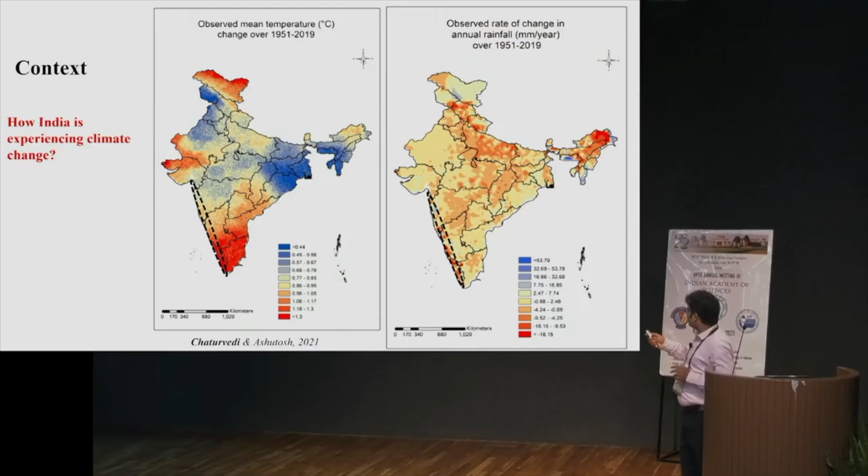I normally speak extempore, but realizing that you're a group of scientists, you're extremely analytical of whatever happens around you, so I thought I'd maybe write it down as well.

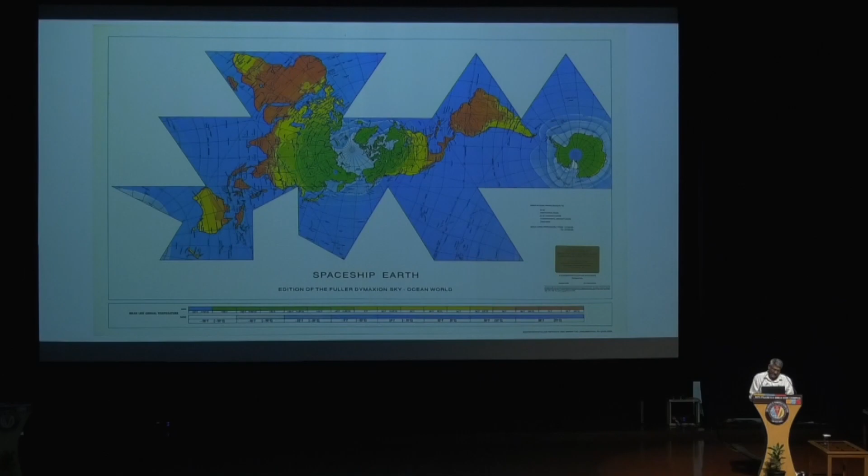He mapped resources across the world and showed how efficiency could be created by tapping resources in creating products, ignoring these man-made boundaries that divide us.

These powerful thoughts influenced my thinking, even in cyclostyled papers. We didn't have Xerox papers at that time. We cyclostyled these copies to start working with concepts of how you work with a triangle.

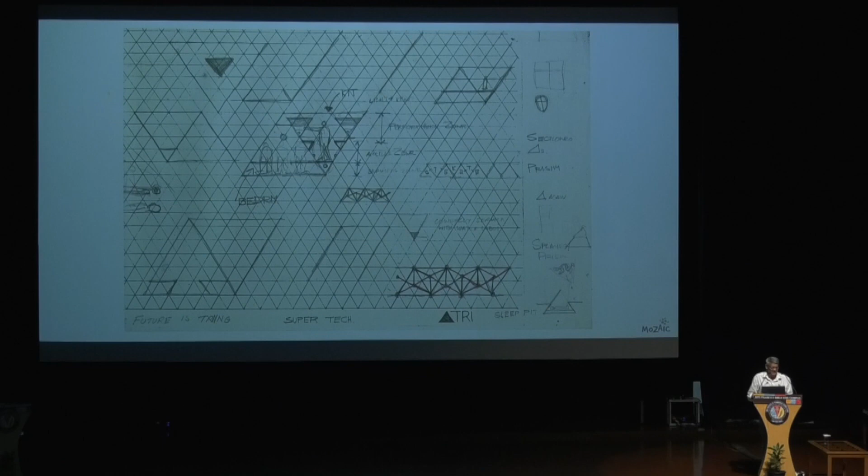Normally as architects, the first thing we draw is a square and we start filling it in or cutting it up. And these went on to developing various thoughts.

This was many years ago for the Goa airport design, using the triangle and eventually translated into a hexagon and subdividing it. This was before the era of aero bridges, where the actual nose of the plane entered the building, and it was a warp slab system.

So from the departure, you walk down a warp slab and enter one side of the aircraft, and on arrival you walk out the other side of the aircraft. So you're always walking down — it's much easier to walk.

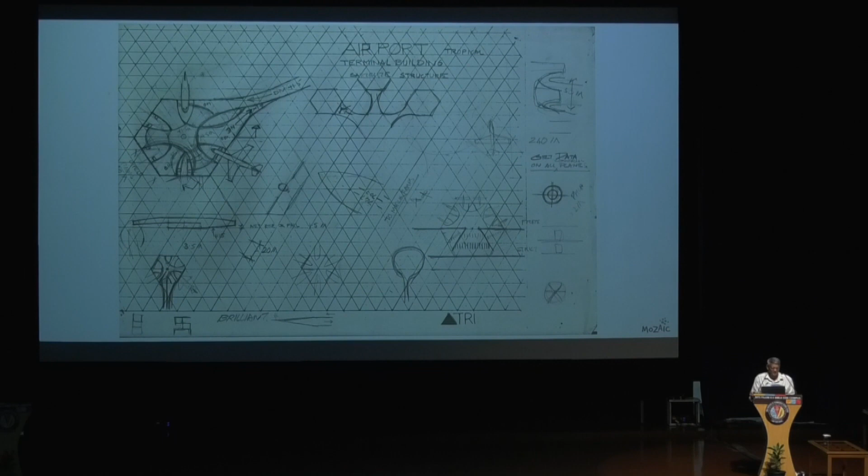And they're connected by a central elevator, which also connects up to the aerodrome tower.

Antonio Gaudi was another great inspiration. His buildings emerged from the earth in natural forms, where the structural approach of nature was explored in highly engineered buildings, almost as works of art.

The learnings of both these masters show up in our own work over the 40 years.

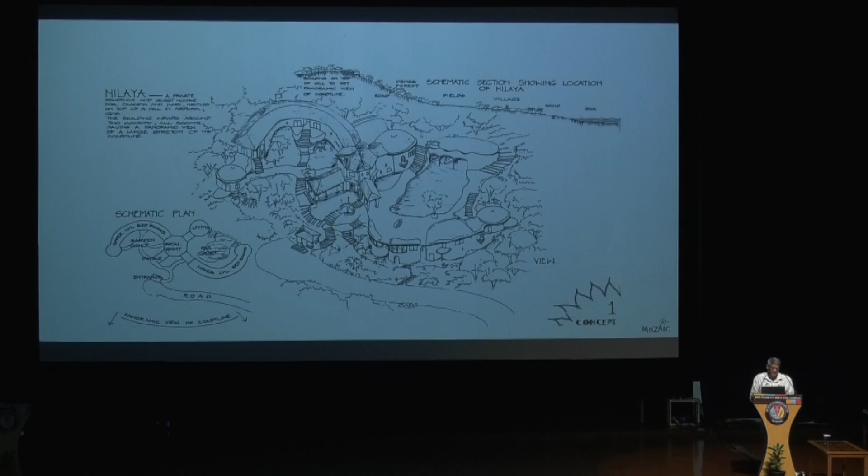Nilaya, built 30 years ago, was rated as one of the 100 best small hotels in the world at that time. It captured the multicultural diversity of Goa, using nature and cosmic themes.

Incorporating craft and recycling building materials, our projects recall the traditional building systems using arches, vaults, domes, with a minimum amount of concrete, reviving finishing techniques like situ floors, lime-plastered walls, using renewable wood resources like coconut and bamboo.

And over the years, we've trained and mentored over 200 building craftspeople who now work in different places across Goa.

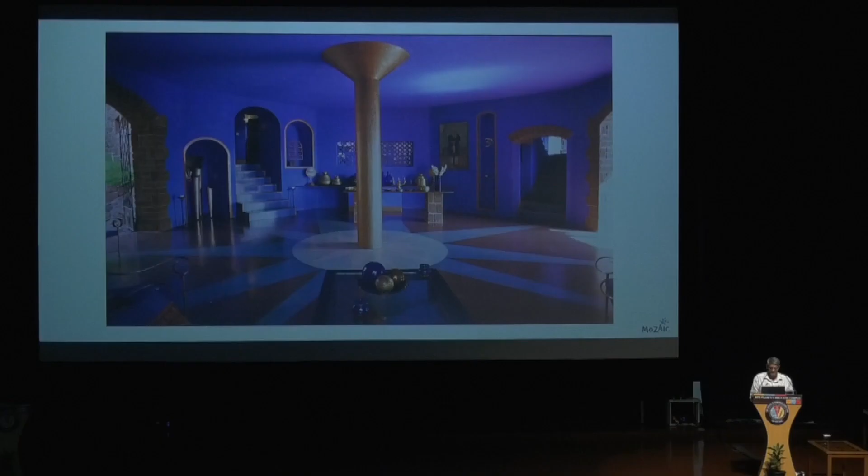The dome, for example, is actually an 11-meter dome, built in plain mud brick, built in 4 days itself, with no concrete at all. A lot of it's recycled materials, as you can see.

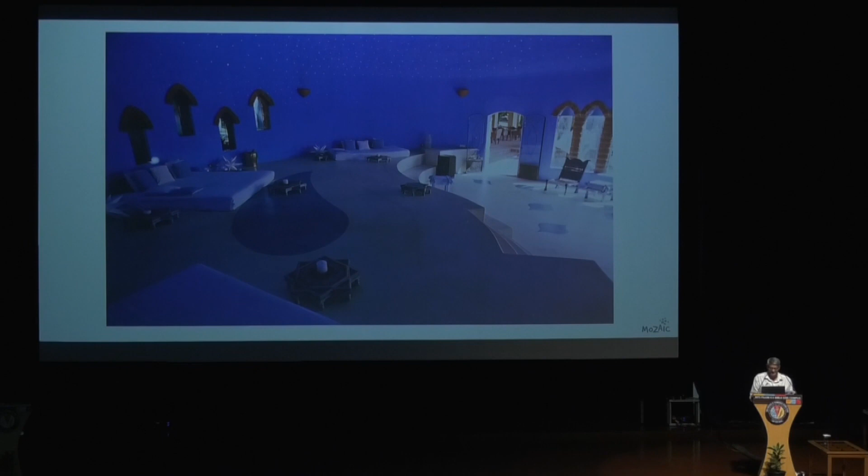And every room is theme-based. It's based on the sun, the moon, earth, and fire.

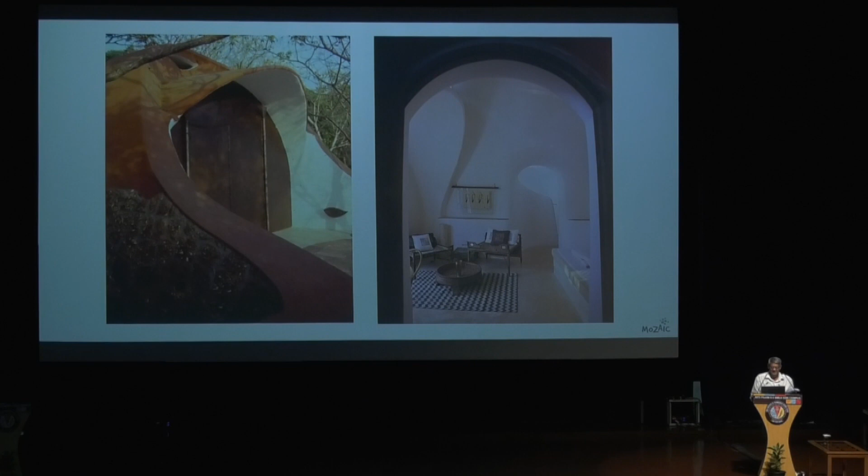The Kannada University in Hampi is an example of architecture responding to the style and form of construction in this historic area. It has the gopurams as visually anchoring structures, but also functional as wind towers that capture air at a high level beyond the radiant heat and hydrate it, thus cooling it through evaporative means, and allowing the cool air to enter this library building, dropping the temperature by about 8 degrees.

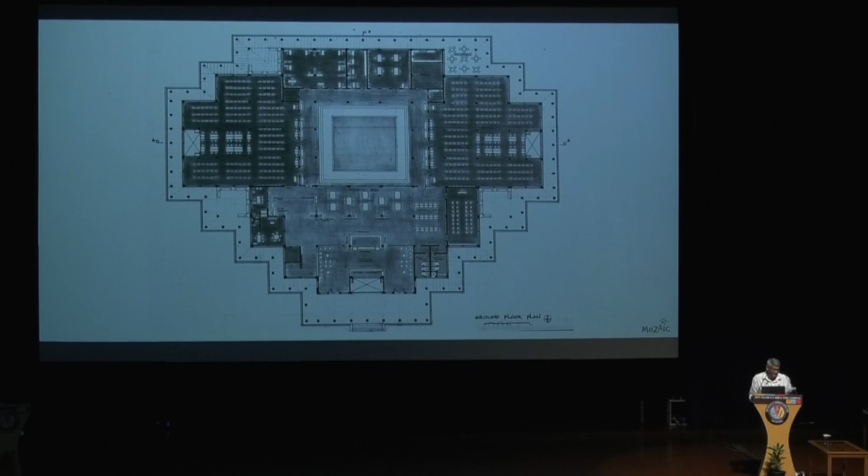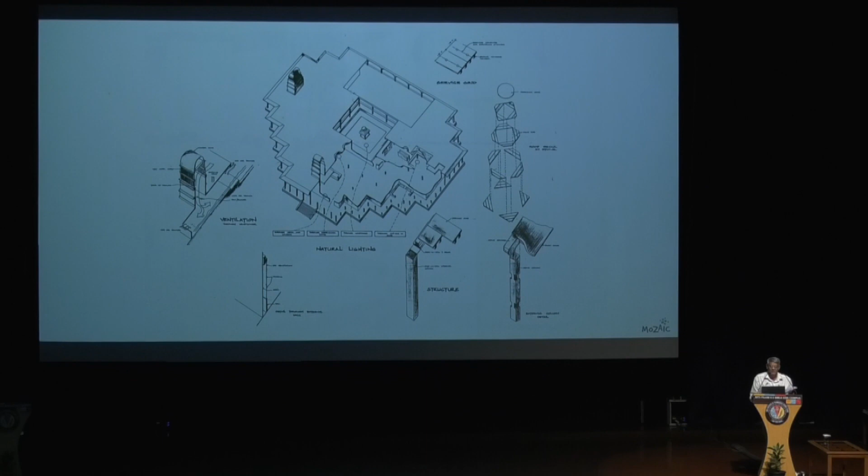It has a central traditional water body tank courtyard from where the heated air escapes, and deep corridors that shade the main building from the harsh sunlight of the area. The structure is built with over 90% local stone, recalling these traditional methods of building, where even the columns are solid granite, about 6 meters tall.

The cathedral in Karwar challenged the typical approach to a religious building by moving away from a symmetrical entrance and responding to the side road which really accessed the property.

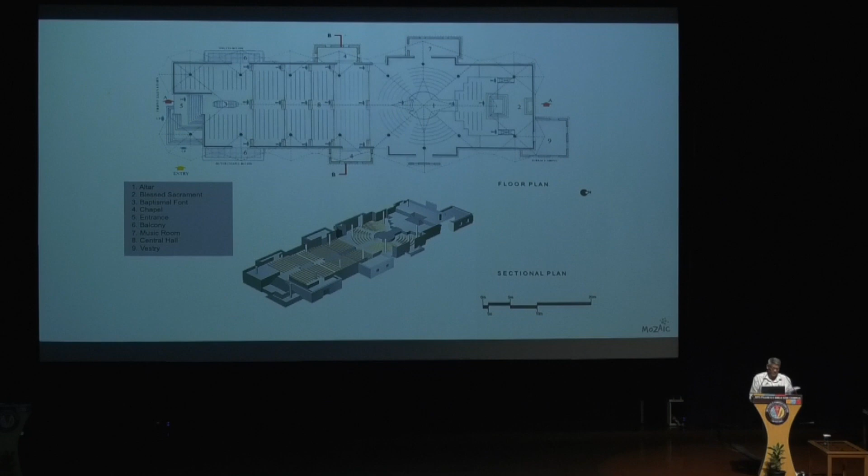Its roof is supported by columns in a tree-like structural system that floated above the screen walls. The building is stepped to enable its occupants to look at the central altar from a distance, and the area below the raised platforms are underground air tanks to even cool the building.

Every work of architecture is a challenge. For the Taj Fisherman's Cove in Mahabalipuram, a 65-room extension, it's situated on a narrow plot in a CRZ area. So we twisted the building and even got Tata Blue Scope to make trapezoidal roofing sheets to respond to its curvature. Architecture is all about adding a twist and pushing the boundaries a little.

The Taj Bandhavgarh Jungle Lodge responds to the local building materials of brick and mud plaster, but with technology tweaks of double walls and integrated heating and cooling systems. It is built with the local men of the village, and the women worked on the architectural decoration and also incorporating the arts and crafts in its interiors and finishings.

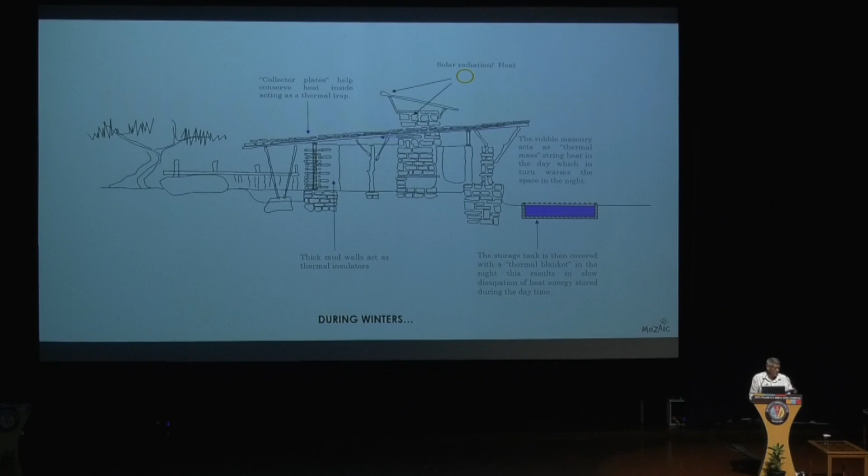The Sarai Lodge did a similar thing in Bandipur and also integrated village construction techniques of stone and thatch roofs to root the architecture of the area. Our lodges don't just respond to the materials and craftsmanship in the area, but also look at passive technologies in heating and cooling the buildings.

Some lodges, like the one in Tadoba, have a different approach, where we use recycled prefab panels to create a building that is lightweight and sits 12 feet above the ground, using fallen jungle wood and recycled thin planks for its finishing.

Being lightweight is an approach that Fuller also spoke about in determining the efficiency of buildings. Hence, in this office building in Noida, we worked on a hollow column, hollow beam structural system, which actually ran the services right through the structural members. Most often, structural services actually run cladded to structural members, creating a messy situation.

Even the air conditioning system was a high-velocity system, much like the ones used in vehicles, giving cool air at its needed points. The building is in steel, completely modular, with stone slabs mounted on neoprene pads.

This allows for change over time and even complete dismantling of the building. And if one sells it after dismantling, one could possibly get more than the cost of building it, given constant rise in construction prices, whereas most buildings are actually demolished and all its value is just landfill.

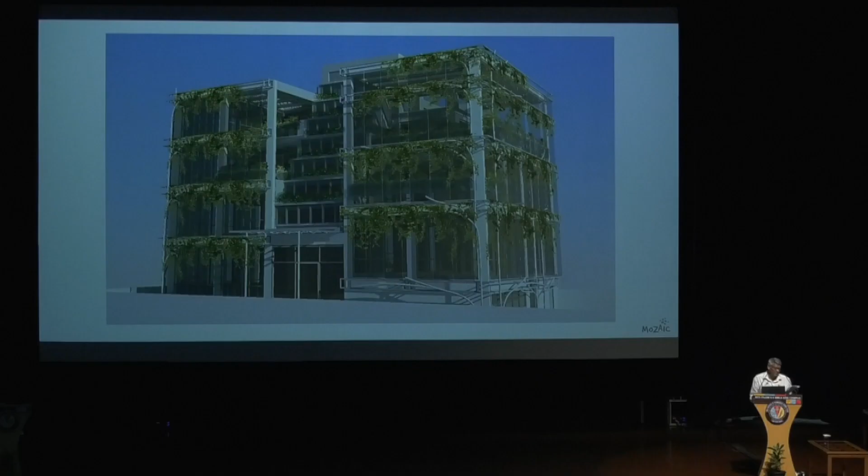Natural stone seemed the most sensible choice from a perspective of embodied energy. But when we visited the quarries, we found tremendous water and air pollution, and more than that, human rights violations, where workers were almost treated like bonded laborers, trying to repay the loans they had taken.

Whereas a vitrified tile, even though it had a high embodied energy, used material efficiently, handled pollution effectively, and gave workers a fair wage. So when you talk about sustainability, it's understanding individual situations and responding to them in a sensible manner.

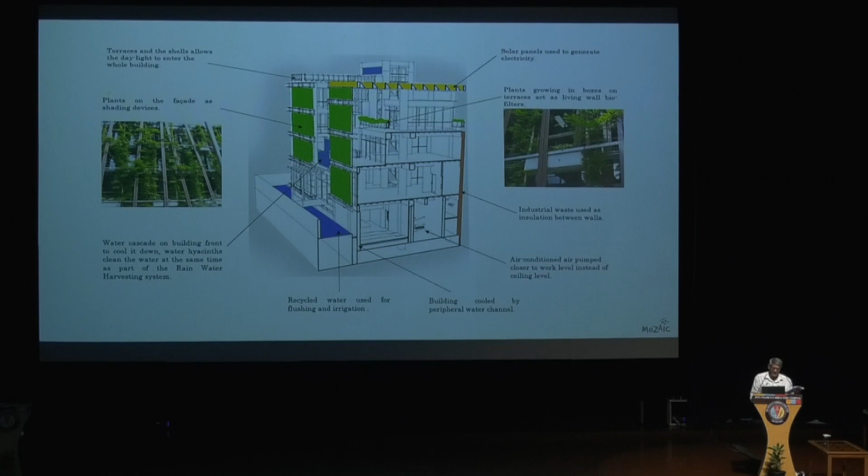We're working on a small 50 square meter, 2-bedroom house, which is completely off the grid, self-sufficient in water, energy, and partly food as well. It has a built-in flexibility and is quick to build. Efficiency is also about the speed of construction and flexibility.

The water has an approach envisioned to be closed loop, cleaning its waste, much like in ships and space stations. Its freshwater and wastewater tanks actually act as the foundations of the main building.

In fact, Fuller in his designs had worked on shower systems for submarines. You could shower in half a glass of water using a high pressure jet in an enclosure where it didn't really need any water drainage point. It was high pressure, so you didn't need soap as well. You just run it over your skin, and eventually the evaporated air would be sucked back into the system and taken on. So we have technologies today that we can actually use effectively in areas where resources like water and energy are in short supply.

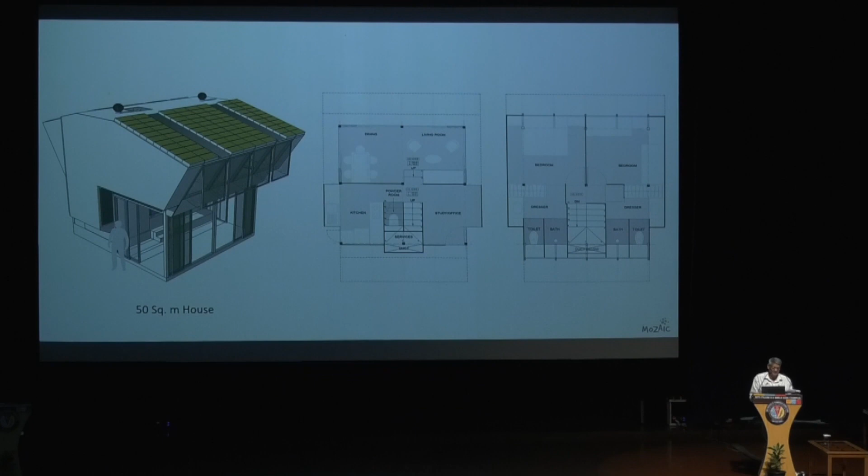This book on sustainability opens one's mind to the various complex issues of sustainability of money, cultures, value systems, community engagement, and challenges of the future. A must-read for any designer concerned about these.

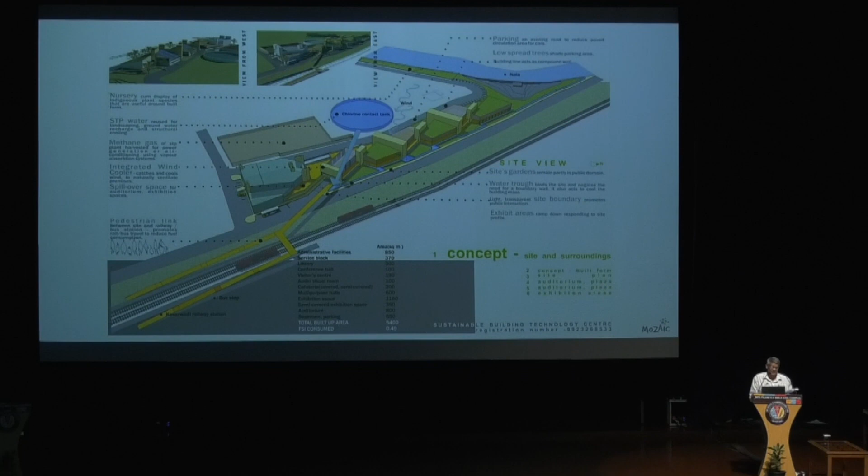We had an opportunity to work on the Sustainability Center at a large scale, having been shortlisted to design the Sustainability Center for the Pune municipality about 20 years ago. It gave us a chance to really understand the issue of materials, technologies, and systems, to deliberate on it and provide possible solutions.

But designing responsibly is also about engaging the end user. In this very small, low-cost house, here in Vasco, the clients actually got involved in purchasing the materials, directly engaging the workmen, decorating the house, and adding all the finer details to it. The boys actually sacrificed their scooter handle, the CDs, and their skateboards and everything. So it was a personal experience, and that's extremely rewarding.

If you're looking at sustainability, it's also about engagement. It's about how do you get people on board to understand these issues and really work with them.

This also brings us to the question of, does architecture need to be permanent? And how light a footprint can we go? This 40-seater beach restaurant for the Taj, we used all natural materials, some of which get renewed every season. It cost about 9 lakhs, and with a profit of about 50,000 every night, it covered the cost of construction in just under 3 weeks.

We suddenly see the viability of an architecture which is really temporary, used only for the purpose that it's meant for.

The Japanese are experts in being lightweight, and for these temporary beach rooms, we used wood much in the same way that they do, lifting it off the ground, keeping it as transparent as possible, enabling one to feel its free-floating nature, and adding a Japanese aesthetic of minimalism driven by nature themes and climate seasons of winter, spring, fall, summer. The interior detailing also included a haiku describing the season.

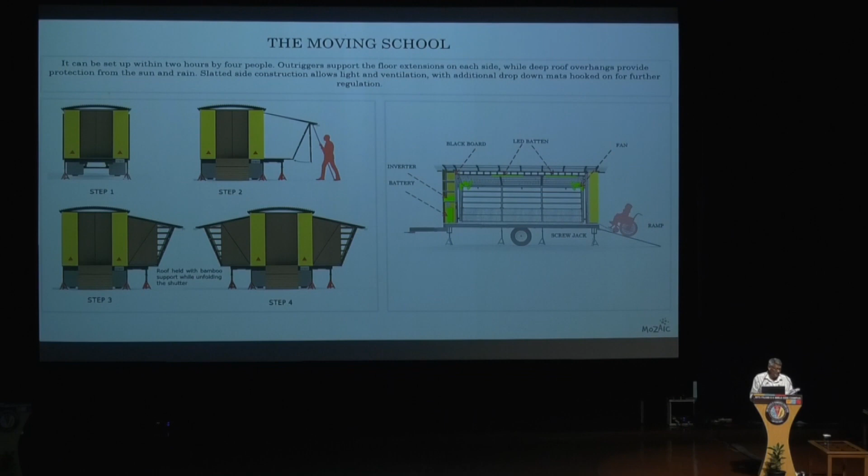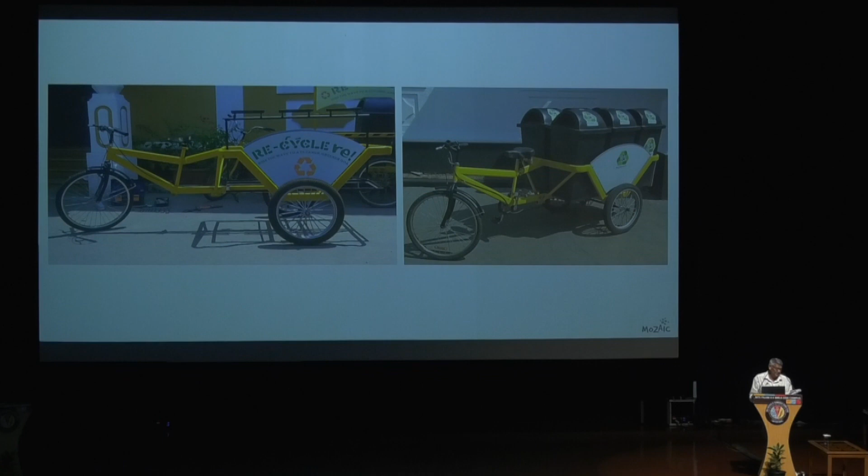It also brings dignity. In this case, designing a trike, which is electrically assisted for Lamani women who normally carry recycled materials across in heavy bags. So this is sponsored by an NGO, which actually allows them to carry these loads in dignity, cycling around with electrical assist.

It's about imparting knowledge and educating them. In this case, teaching kids about composting and how it could be done in a fun manner. You can actually turn the composter around and it composts even faster.

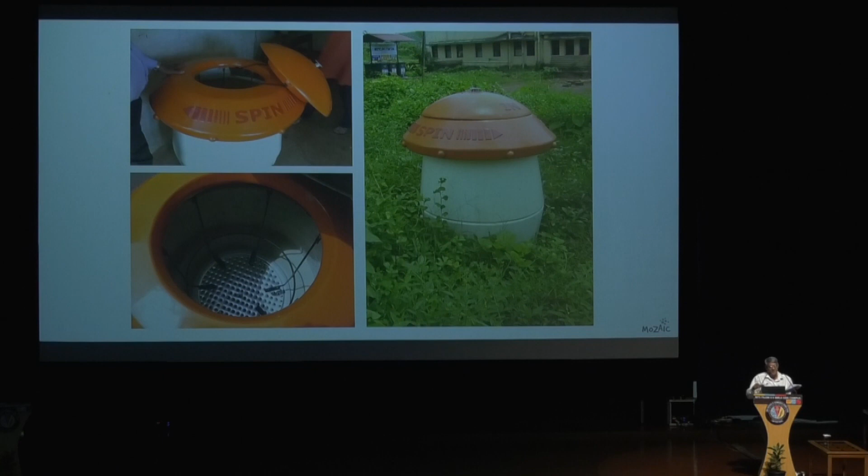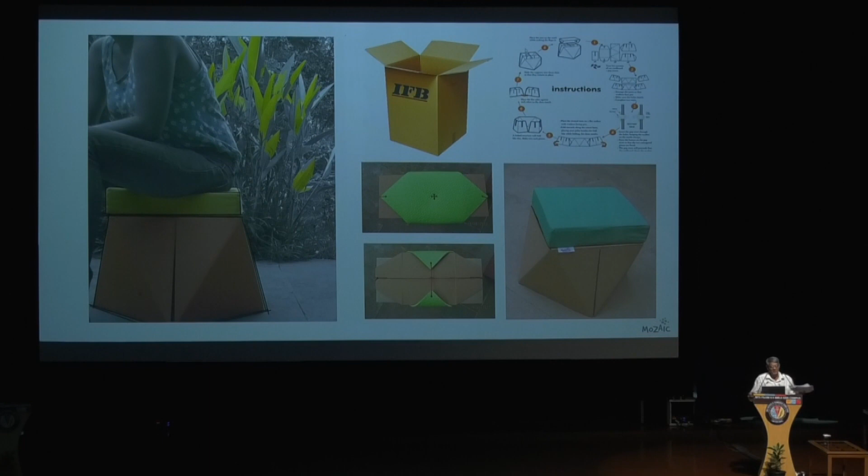Or look at how we can work with industry. Our office actually designs, if you have an IFB machine, our office has probably designed that machine as our product design wing is. So we worked with IFB to actually look at how their cartons could be used effectively, because normally they're thrown. We unpack your machine, the carton is thrown away. And here you can actually reuse your carton as seating. So even the cushioning of the machine, it actually has these inbuilt cushions at very little extra cost.

As a design firm, we felt we could do much more than the typical architectural and product design projects we work on. And so we established the COCOM Design Trust to bring design in the public domain and for greater good.

One of the areas we felt needed to be addressed was the social sector, where we believed that good design could actually solve a number of problems. Design which involves social problems are called wicked problems. And they're problems which are influenced by cultural diversity, social differences. These are really interesting problems to solve because we really involve the public and understand the ground realities.

So we looked at 7 different arenas in which we can actually solve these problems in terms of learning spaces, resilience, environment. So this we held as a workshop, which is where we addressed these 7 issues a few years ago.

We worked with and partnered with Justice Adda, which is an organization dedicated to bring greater understanding and accessibility to justice systems to the common man. We identified 3 typologies, which is the police station, secretariat, and the High Court, as areas where we could make a difference.

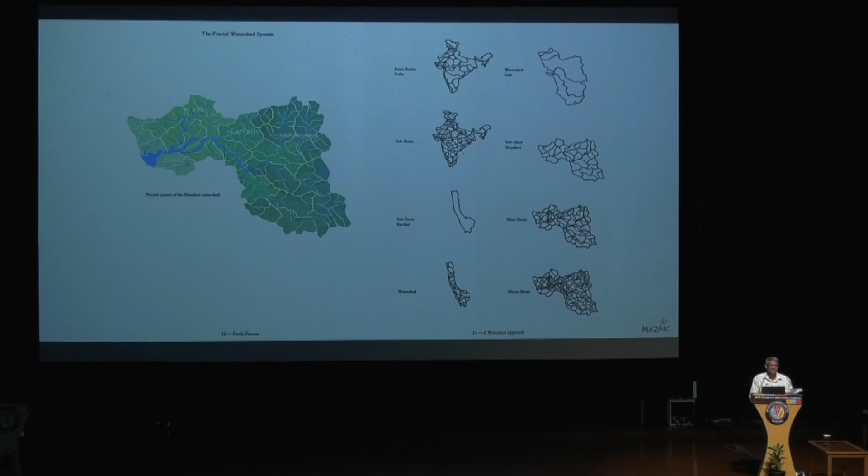We also looked at governance systems, and governance systems are usually bounded by smaller political boundaries, whether it's wards, village panchayats, or districts. But really, a geographical boundary system is a watershed. A watershed is where all the water from an area is collected into a single stream. India, in fact, is a giant watershed, and we subdivide it. If we look at political and governance boundaries by watersheds, we'll have a far more efficient system of governance, where water, the life giver of everything we have, defines our boundaries.

Every village has an asset, and maybe a different asset. Some villages in Goa are known for bananas, some for watermelon, some for rice or other products, being an agrarian society. Coastal villages are known for their beaches, fish, and tourism. So every village has an asset, but maybe a different one.

But how do you actually network these villages to bring economic development, trading the assets that you have? And how do you preserve the assets of its coastal areas, forested areas, field areas? There are many examples worldwide. For example, in the fields, in Southeast Asia, there's the concept of agro-tourism, a live tourism where you're participating in the actual development of the state. The experience is far more rewarding.

How do you link these biodiverse areas through what we call chloro rings? We look at these pockets that are slowly shrinking. You must have heard recently about a leopard entering an urban area in Bangalore. But it didn't enter the urban area, the urban area entered the leopard's area. So we really need to look at how we preserve and connect these biodiverse spots to continue biodiversity as a fabric throughout our state.

We worked with Pratt Institute on a coastal village in Agonda, to study it as a typical case, a case in which tourism was just affecting it. This was about 10 years ago. We looked at how tourism was affecting the village, and being a turtle nesting site, it was extremely sensitive in terms of its development and how that could be brought about, keeping sustainability at its core.

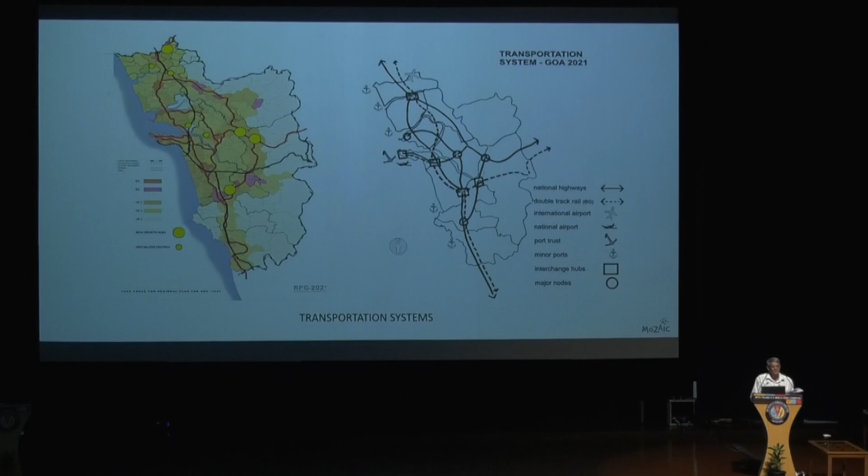We mapped all the eco-sensitive areas of Goa as Eco 1 and Eco 2, preserving them as no-go areas. We also mapped the settlement areas, where development was taking place so far, and mapped them in terms of density. How do we connect these all—to roadways, preserving certain densities so there's no strip or ribbon development stretching across highways? Instead, we create nodes for development, where road and rail meet, or rail and water meet, or areas with at least two networks of transportation to allow for development.

We assisted villages in understanding what their village is all about. It's the first time that, besides Kerala, a participative plan for development was created, where we actually created a framework and took the plan to the people, asking what do you want? This is what you have as an asset—can you map it?

And so the people mapped it. They mapped the village of Para, which is very close to my village—all their fields, forest areas, water resources, animal paths, bird nesting sites, and all the large banyan trees on their property. This creates a certain sense of belonging to the place, a certain sense of identity, and that's what is needed.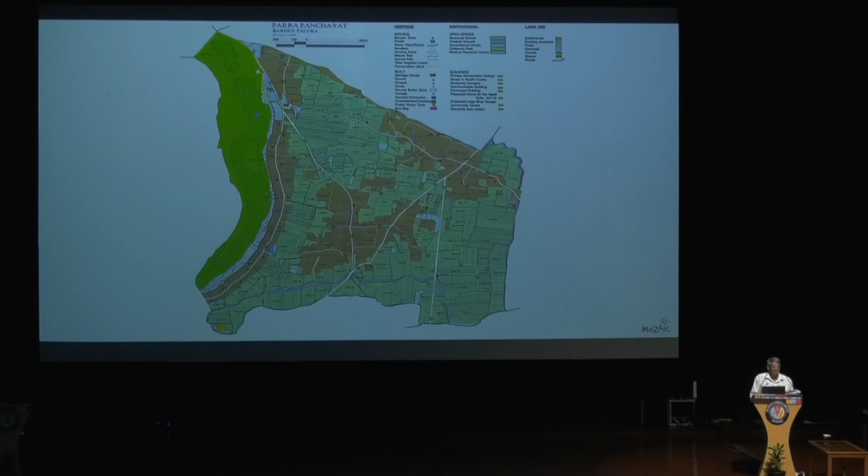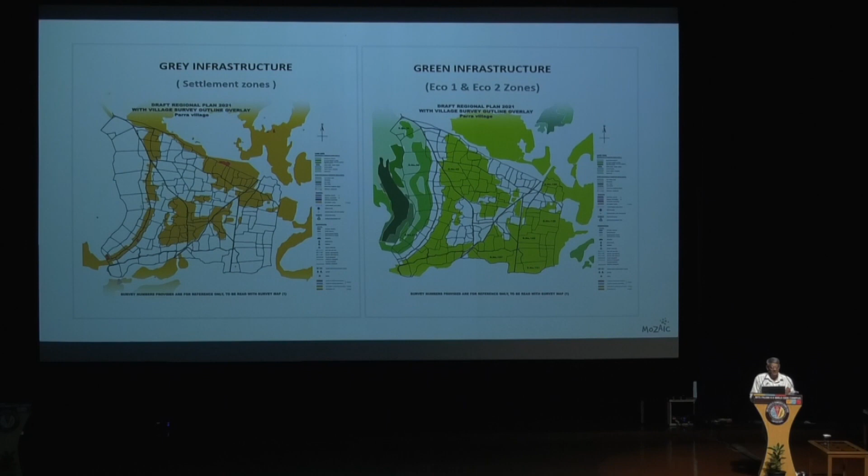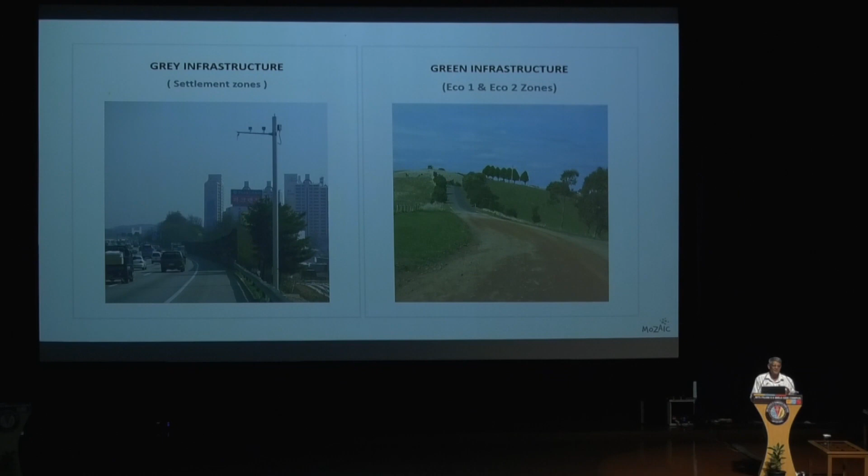We also had to make them understand what development is all about. So we created a presentation about what development and infrastructure means. When we talk about infrastructure, we normally think roads, buildings, factories, but infrastructure is also where we get our water from, our food from, where we sequester carbon dioxide, where we get our energy from. As a resource, we need about four times the area of natural resources versus the hard or gray infrastructure to support it. So to give this understanding, you cannot convert all the land into settlement area and develop everything. You have to have a green space, which is your breathing space and resource space for everything.

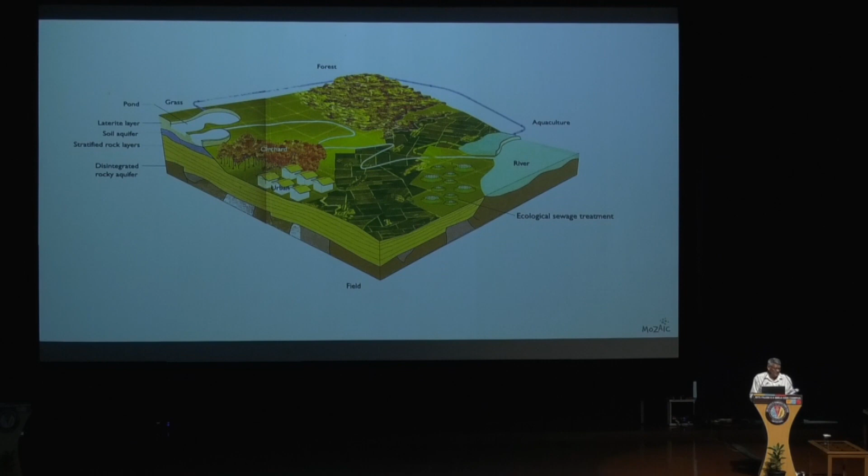While the regional plan is many years old now, the issues of unsustainable development still persist. With people concerned about how to address it, a few of us got together and created a platform called Act for Goa, which empowers people to police, complain, and lobby for development that is appropriate to Goa.

Act for Goa has a website and an app where you can map a place—you Google pin it and say a field is being filled, or some development's happening, or something's being cut. It'll tell you the owner of the field, pop up a complaint form, or let you find out if it has a license. So this empowers the people.

I'm part of the Goa Foundation, and we get constant complaints—somebody says someone's cutting my tree, but you can do something about it. So Act for Goa looks at ways people can take action on their own by empowering them with the data and the means to do so.

All development, they say, is market-driven, and the best way of handling it is creation of a circular economy and closed-loop systems. All over the world, people have addressed this in different ways, realizing that social aspects like health, equality, energy, and food are important, as well as ecological aspects like climate change, land conversion, and pollution. This led to a concept of a three-dimensional circular economy, otherwise known as a donut economy—developed by an Oxford professor—a resilient economy that takes both social and environmental aspects on board.

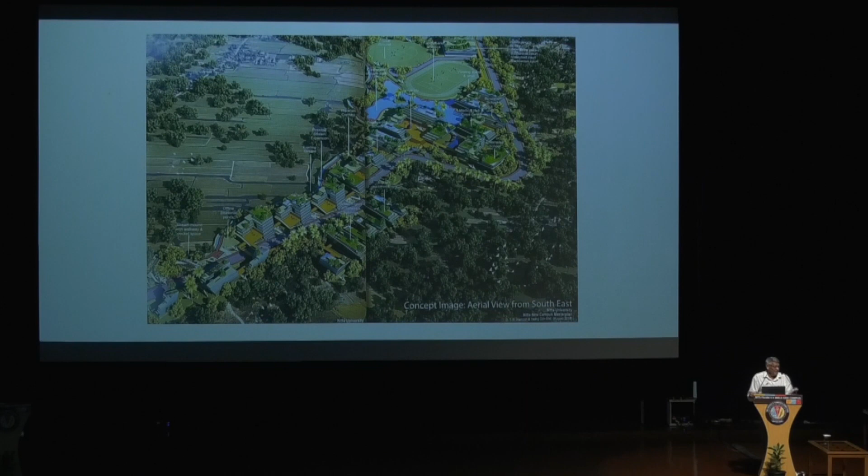Envisioning the future is always exciting, and like scenes from Star Wars, has many possibilities. Though Star Wars seems to be from a parallel universe, it is actually about our present—a fight of good over evil, to sustain a future with all its potential technologies and advances, but always drawing from the imagery and values of the past. We all have a potential in whatever field we are in to envision and design our future. May the force be with you.

Very impressive talk. I would like to know if you would comment on the differences between the design of machines, which scientists do most of the time, and the design of structures that you design normally. What are the crucial differences, if there are any? Building machines, of course, they have a purpose, and here also there is a purpose. So what would be the crucial differences?